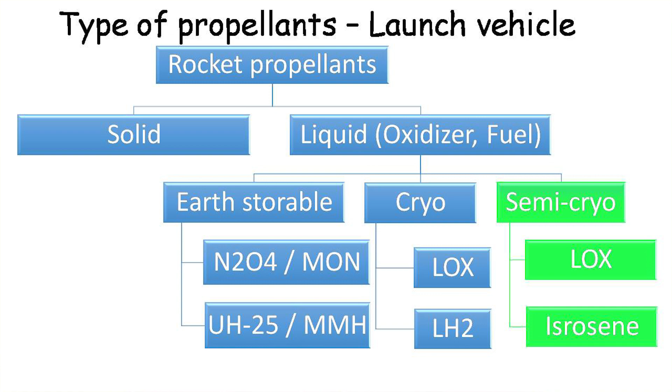Liquid propellants and required gases need to be filled in the launch vehicle prior to liftoff. Earth storable propellants are storable in liquid condition in ambient atmosphere. They are hypergolic, toxic and hazardous in nature. Whereas cryopropellants are stored in liquid condition below -150 degrees Celsius and are flammable. The newly designed stage will use semi-cryopropellants which are eco-friendly and use liquid oxygen as oxidizer and kerosene as fuel.

Now we will see how the liquid propulsion stage works. It has a fuel tank and an oxidizer tank. The propellant is drawn and pumped to the combustion chamber where they are mixed in appropriate ratio and burnt. The combustion produces a great amount of exhaust gas at high temperature and high pressure. The exhaust is passed through the nozzle which accelerates the flow.

It has higher specific impulse than solid rockets. They are capable of being throttled, shut down and restarted. Because of this capability, they are used in long-term missions.

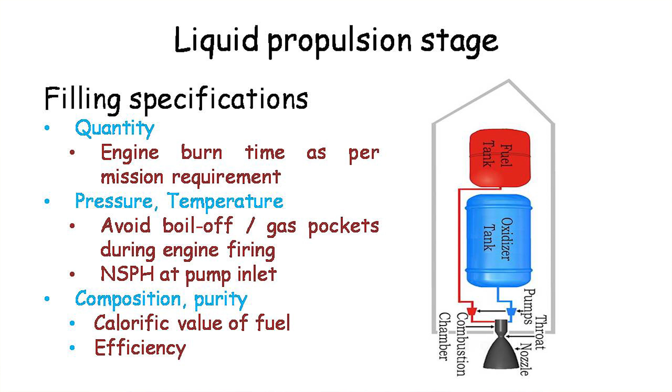Based on the engine burn time required for the mission, the quantity of propellant to be filled is decided. The propellant needs to be fed to the pump in liquid state. Hence, the temperature of the propellants must be well below the boiling point, or gas pockets will be generated at the pump inlet. To maintain a net positive suction head at the inlet of the pump, stage tank pressurization is required. The purity and composition of the liquid propellant is one of the determining factors of engine efficiency.

So how do you do it? How do you fill our normal vehicles? The person at the station asks what type of fuel you would like to fill and what quantity is required. Once the details are received, he initializes the fuel reading in the panel to zero. The compartment is opened. Initially he starts the filling slowly, then estimates the fill rate he has to get.

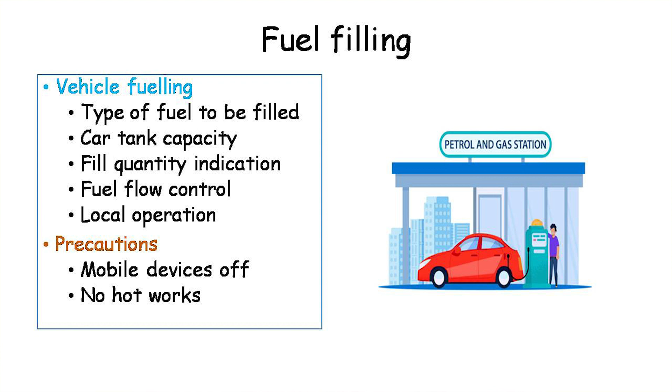Once it reaches the required quantity, checks are made to ensure it doesn't overflow. The fill level of the tank is monitored, and the quantity filled is available at the panel.

Similarly, for liquid propellant stage filling, the launch vehicle is brought in assembled condition. In the GSLV Mark II vehicle, the GS1 stage is solid and assembled.

L40 strap-ons and GS2 stages are filled with storable propellants, while GS3 stage is filled with cryo propellants. The filling sequence is GS2, then L40s, then GS3, which is filled nearest to liftoff.

The propellant storage is spread around the launch pad. Liquids need to be brought to the pad and filled into empty tanks. For filling, we need to know the stage tank capacity, fill level detection, quantity to be filled, fill temperature, and fill pressure.

These operations need to be carried out remotely and automatically without manual intervention. The filling operation starts from 24 hours to 40 seconds before liftoff and must be completed with specified parameters in specified time.

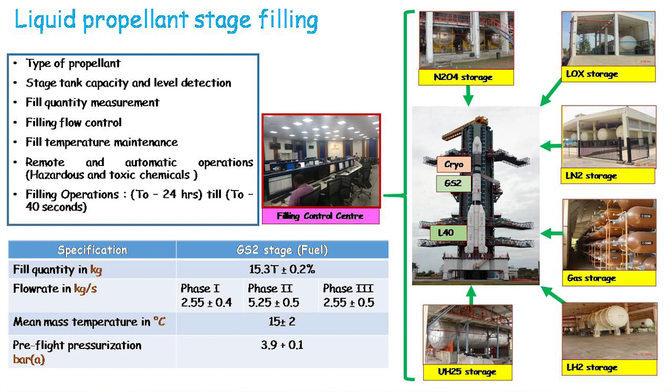For instance, fuel filling to the GS2 stage requires approximately 15.3 tons, which varies according to mission requirement, with an accuracy of 0.2%. The propellant filling system is a Herculean task accomplished through a mechanical system, an instrumentation system, and a process automation system.

What is a mechanical system? It includes the equipment and process circuits required for storage, handling, conditioning, and transfer of process fluids. We are talking of filling tons of propellant.

These need to be stored in a pressure vessel, a container designed to hold gases and liquids at pressures substantially different from ambient. Design involves parameters such as maximum safe operating pressure, temperature, safety factor, corrosion allowance, and minimum design temperature.

In case of cryo, the tank will experience temperatures as low as minus 253 degrees Celsius, and it needs to be maintained with minimum evaporation loss. Based on the temperature specification, we have to cool all propellants.

A heat exchanger is a system used to transfer heat between fluids. The fluids may be separated by a wall to prevent mixing, or they may be in direct contact. This type of chilling is used for storable propellants.

A vacuum ejector produces vacuum by means of the Venturi effect. The motive gas leaves the jet at high velocity due to Bernoulli's principle, resulting in low pressure and generating a vacuum. This type of chilling is used for cryo filling.

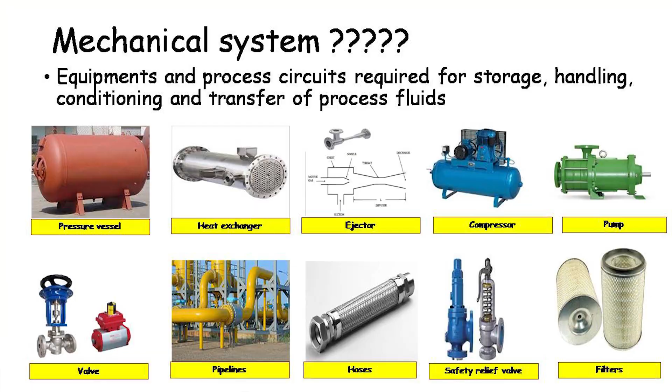We have to pump the propellants to an elevation, so we use different types of pumps. For storable propellants, we use hermetic pumps for absolute leak tightness and high reliability during filling.

A valve is a device that regulates, directs, or controls the flow of liquid by opening, closing, or partially obstructing the process lines. Pipelines are used for long distance transportation of propellants.

Vacuum jacketed pipeline is used for transferring supercooled gases in liquid form. Cryogens like liquid oxygen and liquid nitrogen must be kept cold during transfer, or some of the liquid will become gaseous and leak out.

A hose is a flexible hollow tube used to carry fluids from one location to another with quick connect and quick disconnect mode. A safety relief valve opens if there is a rise in pressure. Filtration removes solid particles from the propellant or gaseous medium, while permitting the fluid to pass through.

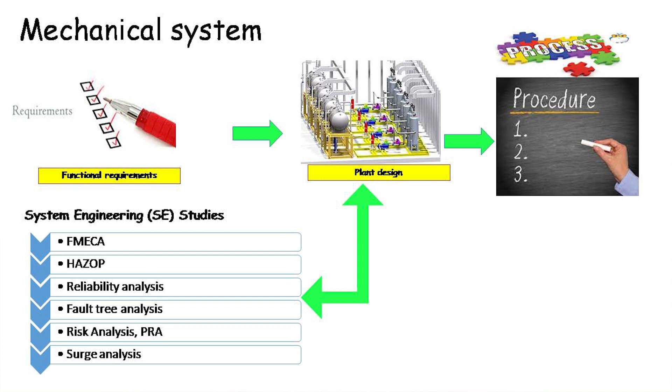The mechanical system, based on stage inputs, determines the functional requirements, and the plant is designed using required components. All engineering study inputs are embedded into the design so that a fault-free, low-risk, and highly reliable system is obtained. The process measurement and control requirements, and the process procedure to be adopted, are charted out.

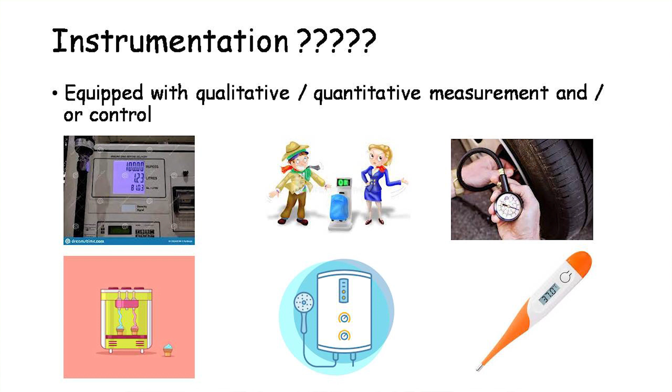These requirements are then given to the instrumentation system. What is an instrumentation system? It equips the plant or process circuit with qualitative and quantitative measurement and control.

How do you select the instruments? Based on the application and the range. Instruments are selected based on the range of measurement, and certified instruments suitable for hazardous areas are chosen for propellant applications.

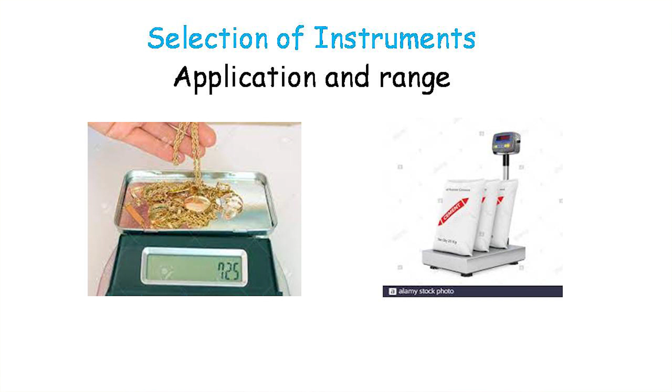If we have a pressure measurement of 10 bar and 7 millibar, appropriate instruments need to be selected. The principle and technique of measurement shall be chosen appropriately—it can be primitive, invasive, or non-invasive.

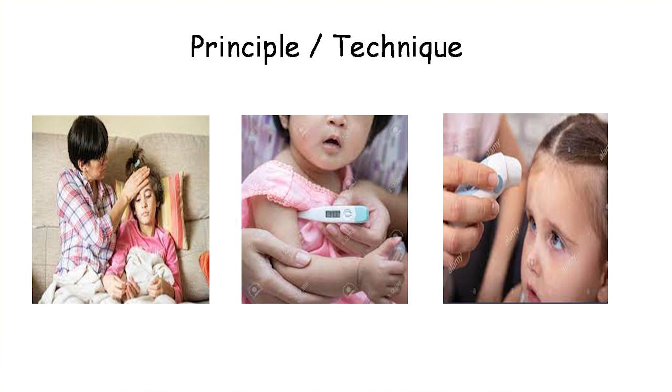Due to high stability, resistance temperature detectors are used for temperature measurement of all circuits—PT100 for storable propellant temperature measurement and PT500 for cryo temperature measurements, for high sensitivity at lower temperatures. Mode of operation.

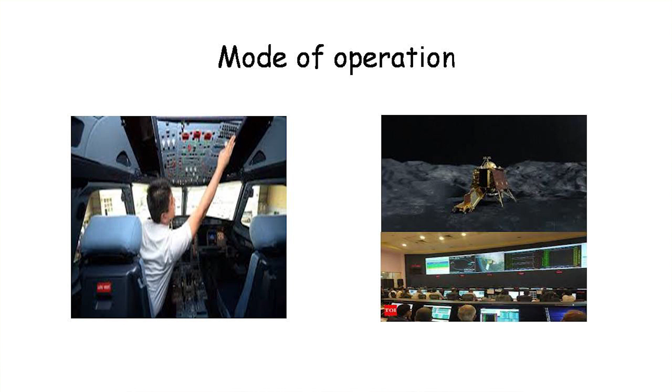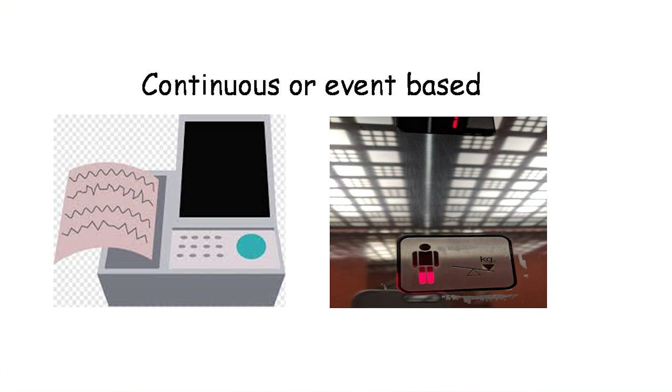If the system needs to be monitored and controlled remotely, then an appropriate instrument capable of transmitting the signal shall be employed. In our case, being a hazardous application, all measurements and controls have this capability. Continuous or event based: whether the measurement and control needs to be continuous or event based, we will select the instruments accordingly. If it only needs to be known that pressure has reached above 10 bar, a pressure switch can be used. If exact pressure values should be known, then continuous pressure measurement with a pressure transmitter is employed.

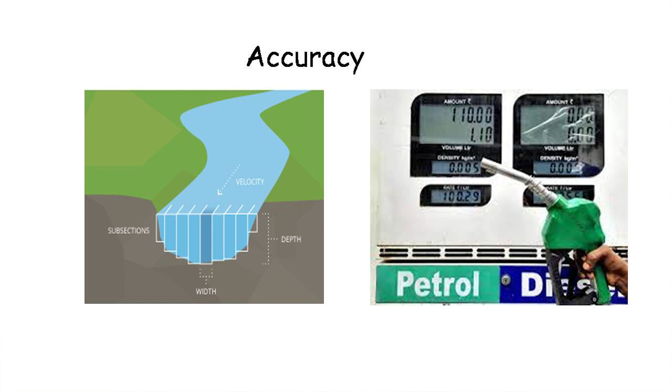Accuracy of measurement. Earth storable filling quantity is quantity based, and ground quantity measurement is used for filling quantity computation, so highly accurate mass flow meters are employed. Whereas cryo filling is not based on ground measurement; it is based on stage level and temperature measurements, so we go in for orifice flow meters.

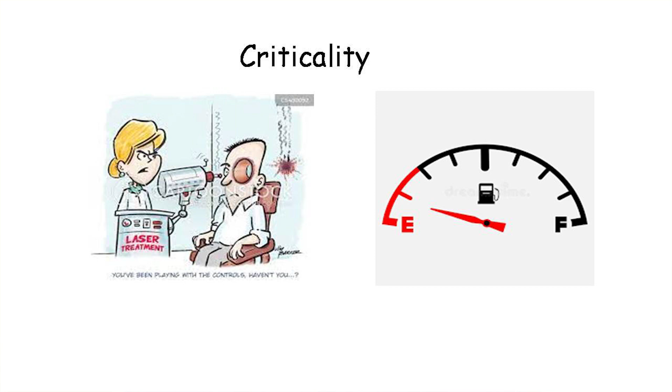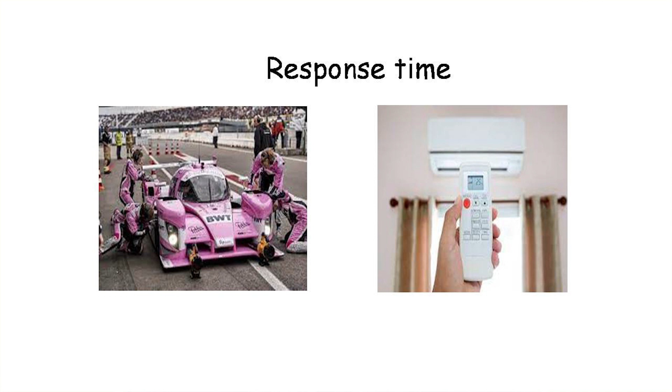Criticality of the system. If non-performance of the instrument can be a deterrent to any operation or the safety of the system, then it is critical, and highly reliable instruments and redundancy are incorporated. Response time: based on the parameter measured, how quickly a sensor is able to react to changes in the measured parameter. If the process variations are fast, the instrument employed shall be capable of capturing them. If the process is sluggish, a high response sensor will not be of any use.

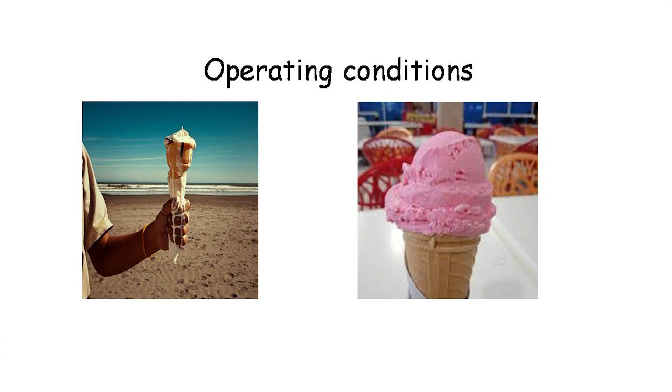Operating conditions. Environmental and operating conditions are most often neglected but need to be considered while selecting the instrument. For instance, instruments are susceptible to corrosion due to the saline environment of the coastal region. This is mitigated by using sacrificial coating on the instruments. For example, all the connectors we use are provided with cadmium coating for protection from salinity. So based on these criteria, these instruments are selected.

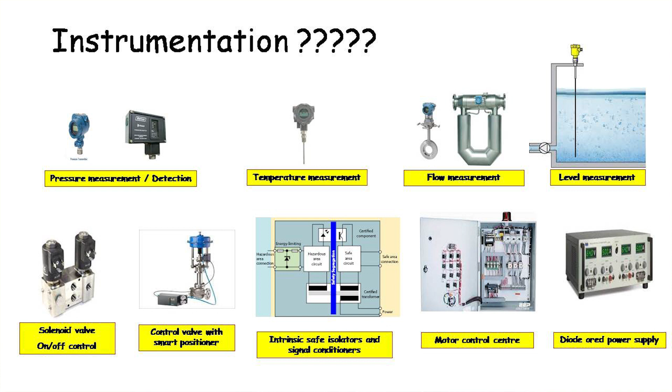Smart instruments for pressure, temperature, flow and level. For control, we have dual redundant solenoid valves, smart control valve positioners, and intrinsically safe isolator cum signal conditioners, which isolate the hazardous area from the safe area. They also condition the input from the transmitter into a suitable form for the automation system. Motor control centers for pumps and dual redundant power supply.

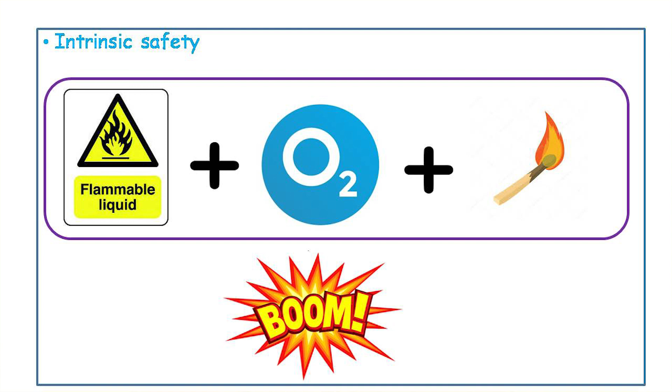So what are the extra features available? Intrinsic safety. In case of oxygen with a flammable liquid, an ignition energy is sufficient to cause an explosion. So the explosion can be avoided and safety can be ensured by limiting the energy available at the hazardous region. This is done by employing intrinsically safe isolators.

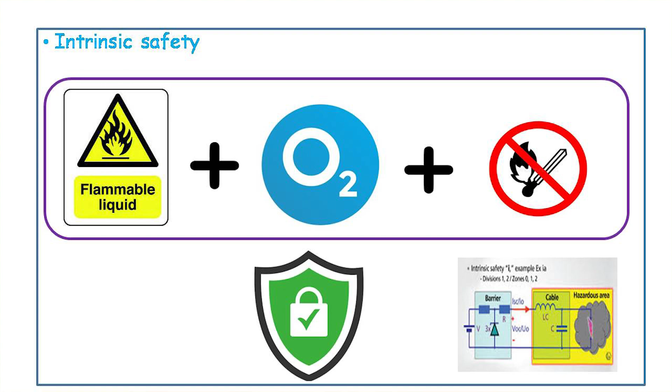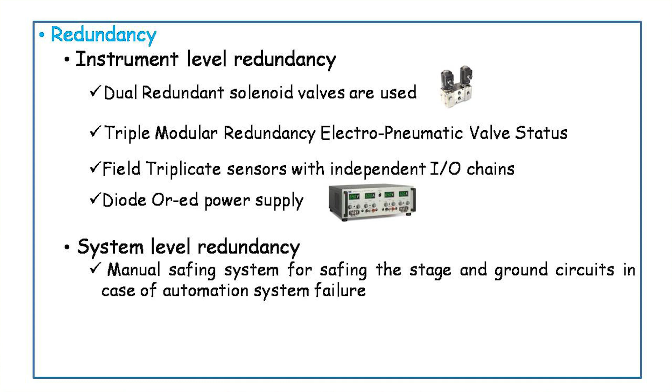Next is redundancy. The intended operation needs to be carried out even in case of any failure. The function of the failed component or system will be done by a substitute component or system incorporated. Two types of redundancy are available, component level as well as system level. For example, dual redundant solenoids are used, where two coils and two valves are present to operate a single valve. Triple status for valve status monitoring. Main and redundant power supplies, which are again fed with main and redundant UPS.

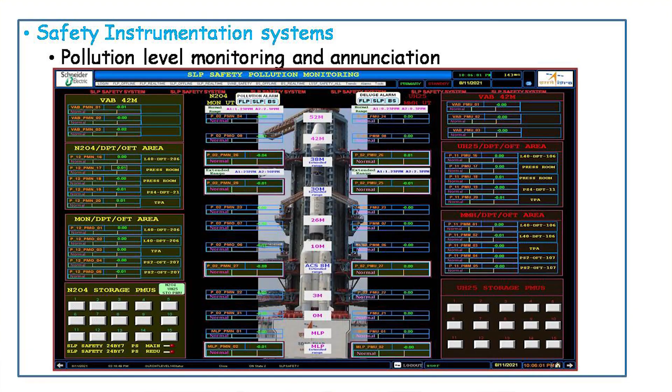For system level redundancy, we have a manual safing system for safing the ground and stage circuits in case of automation system failure. We have the safety instrumented system. All storage and the launch pad are monitored for pollution levels, and alarming is provided locally as well as remotely. A water based fire protection system for post launch propellant dilution in case of spillage.

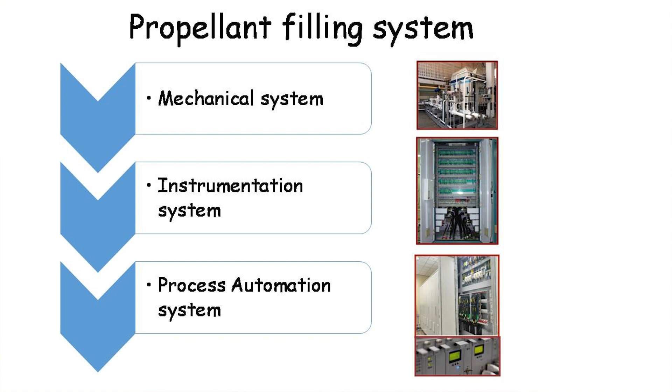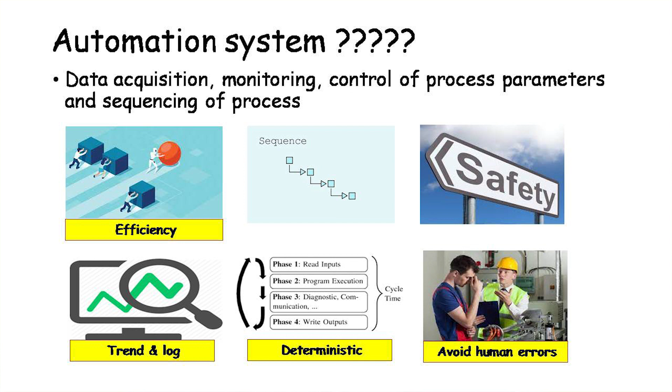Now we have the automation system. Once the input is given from the process for the process procedure and the signals are obtained, how the data needs to be acquired, monitored, controlled and sequenced is done by the automation system. With automation, the process can be handled efficiently, safely and in a deterministic way, and manual intervention can be avoided to the maximum possible extent.

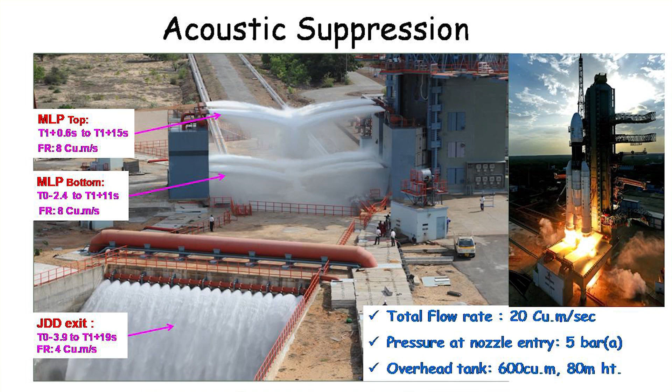We will see an example of the acoustic suppression system to give a feel of sequencing and the reaction time available for any action. The acoustic suppression system is used to suppress the jet noise at liftoff for GSLV Mark III. Noise is suppressed by staged water injection at different locations at the launch pad. The jet deflector valves need to be opened at 3.9 seconds before liftoff. The MLP bottom valves need to be opened at 2.4 seconds before liftoff. And the top MLP valves need to be opened at 0.6 seconds after confirming liftoff.

In case of any launch hold at any point of time, the previously opened valves need to be closed, or the launch vehicle at the pad will be impinged with high velocity water. Hence an automation system which handles it efficiently needs to be incorporated.

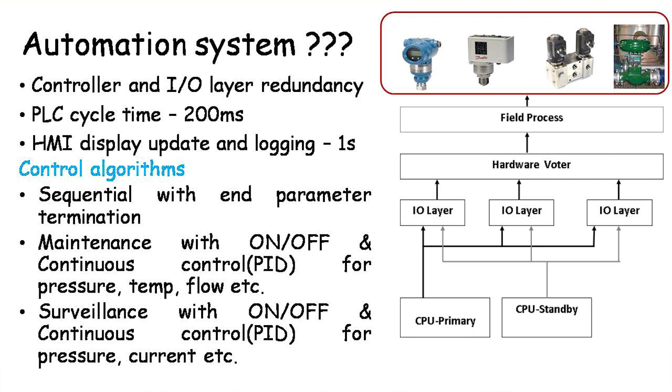The outputs of the sensors are signal conditioned and provided as input to the input card of the automation system, and the output commands are interfaced to the commanding elements of the instrumentation through isolators. Controller level and IO layer redundancy is also available. Control algorithms shall be sequential with end parameter termination, or maintenance with on-off or continuous control for pressure, temperature, flow and level control. Surveillance with on-off control or continuous control for any of the interlocks.

Now that we have seen the propellant filling system, the mechanical system, the instrumentation system and the automation system, with that knowledge we will try to instrument the circuit and control the filling remotely. For that we have a storage tank where the propellant is stored, the stage tank where the propellant needs to be filled, and a pressurization circuit to pressurize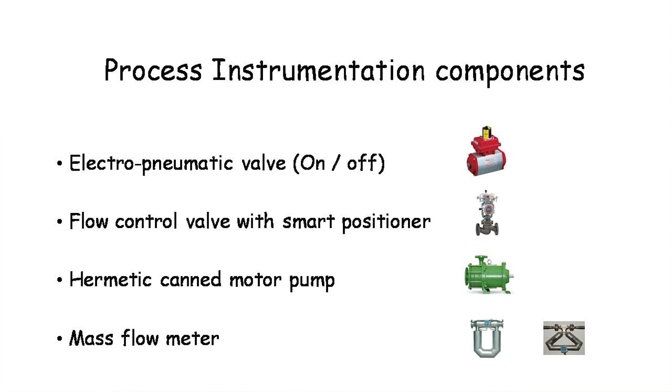the stage tank. For this we will have process instrumentation components like electro-pneumatic valves, flow control valves, a hermetic canned motor pump and mass flow meters, plus pressure transmitters, temperature and level sensors for process parameter measurement. Initially the storage tank needs to be instrumented so that the pressure, level and temperature parameters of the tank can be viewed remotely, and the outlet of the storage tank and the inlet to the stage tank need to be opened or closed. We have electro-pneumatic valves for that purpose.

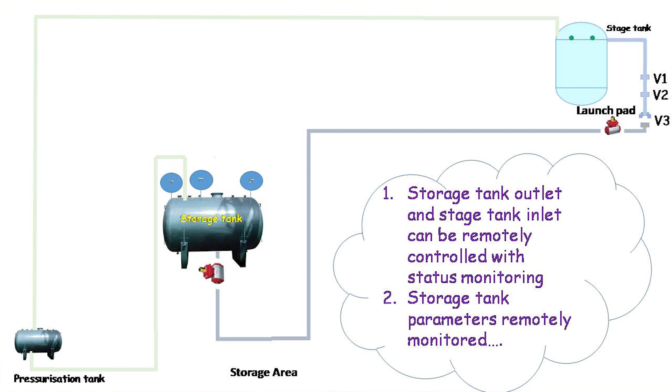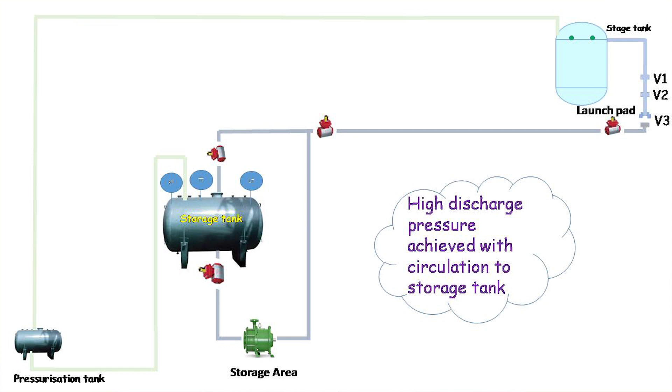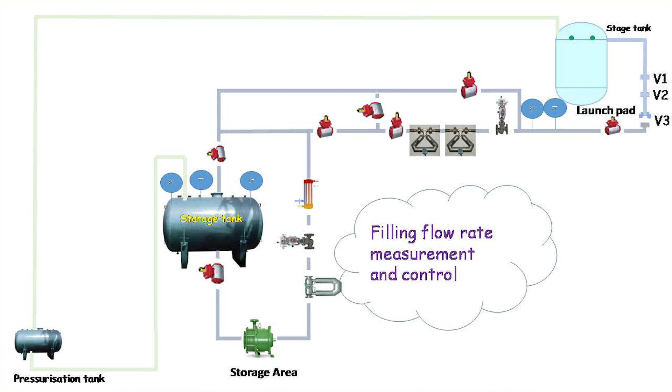Now that it is remotely monitored and controlled, we will go for the pump, which is required to pump the propellant to a higher elevation where the stage tank is located. Once this is achieved, we will go for a propellant chilling circuit, which involves a heat exchanger that removes heat from the propellant, and the flow needs to be controlled with a flow control valve and measured using a flow meter. The filling flow rate and control at the stage end need to be attained. For this we have mass flow meters as well as flow control valves at the launch pad area.

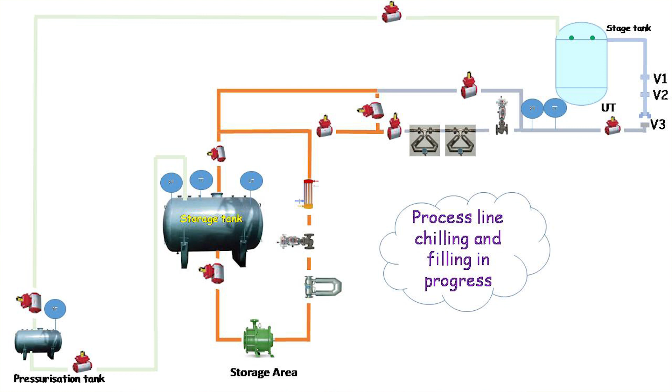Once this is done, we have to control the pressure of the ullage medium of the tank. This is done by opening or closing the valves at the inlet of the stage tank as well as at the outlet of the pressurization tank. Now the sequence will be: first the pump will be primed and the propellant will be chilled. Next, process line chilling and filling of the process lines take place. After this, the propellant is allowed through the mass flow meters and the healthiness of the mass flow meters is verified.

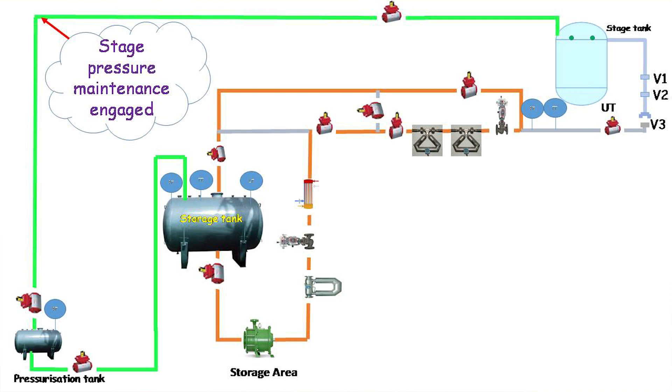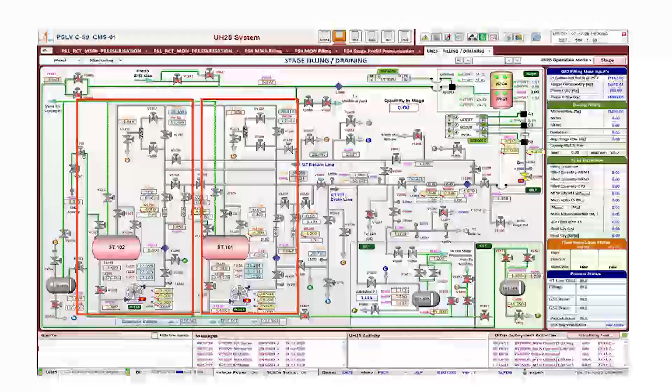Once that is done, the stage pressure maintenance is engaged. The stage pressure needs to be maintained during the filling operations. The stage valves are commanded so that propellant filling starts. Once it completes, a level sensor shows that propellant filling is completed. After completion, the stage valves are closed so that further filling will not take place. Based on the filled quantity, whether complementary draining or complementary filling is needed will be decided. This is the actual circuit for UH-25 fuel filling to the rocket, which incorporates redundancy and fault-free, risk-free and safe operations.

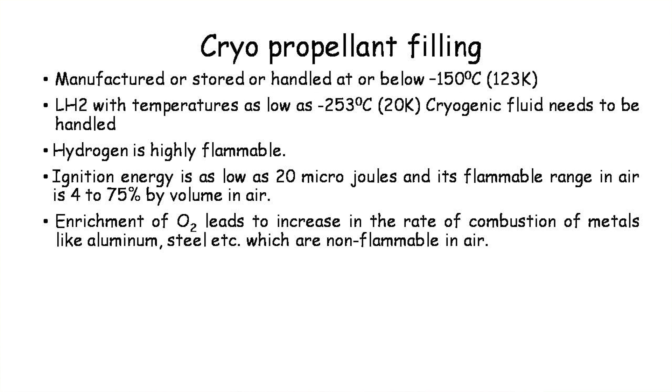Now we will see about cryopropellant filling. Cryopropellants are manufactured, stored or handled below minus 150 degrees Celsius. LH2, liquid hydrogen, has a temperature as low as minus 253 degrees Celsius. These fluids need to be handled safely. Hydrogen is highly inflammable, with ignition energy as low as 20 microjoules, and its flammable range starts from 4%. Hydrogen detectors are employed for leak detection even as low as 0.5%. Enrichment of oxygen due to liquid oxygen leakage may increase the rate of combustion of metals like aluminum or steel, which are non-flammable in air. Oxygen detectors are employed for this leak detection.

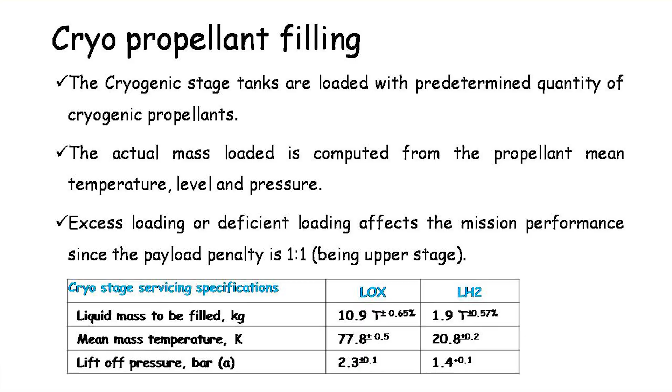Now let us see how we fill the cryopropellants. They need to be loaded with a predetermined quantity. The actual mass loaded is computed from the mean mass temperature, level and pressure. Excess or deficient loading affects mission performance since it is the upper stage. Now the sequence of filling of the LOX stage. Liquid oxygen from the storage tank is allowed through the pump circuits for chilling and priming. Once chilling and filling of the storage circuits is achieved, the propellant is pumped to the coolers where it is chilled and filled to the stage initially at low flow rate, then at a higher flow rate till

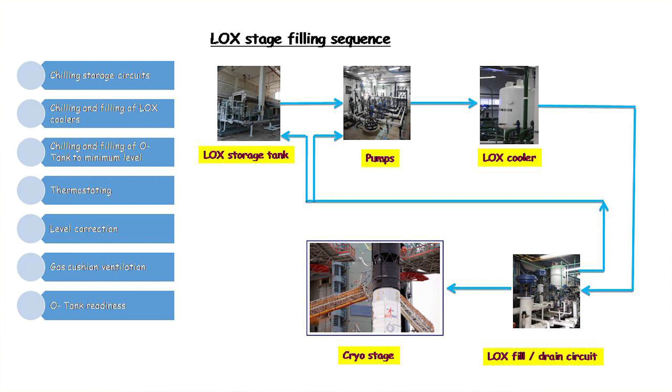the minimum level. After minimum level filling, thermal stratification is removed by draining liquid oxygen from the bottom of the tank and spraying liquid oxygen from the top. This process is called thermostating. After thermostating, propellant level correction to flight requirement is done. The ullage, the gaseous oxygen in the top portion of the tank, is substituted to avoid condensation and reduction in tank pressure during flight. After pressure correction, liquid oxygen stage readiness is generated. Similarly, readiness signals are generated for fuel tank and gas bottle filling. Once all operations initiated by the automatic launch sequence are completed, liftoff takes place at T0.

So we have seen what systems are required for filling, how they are selected and interfaced, and how the operation takes place.